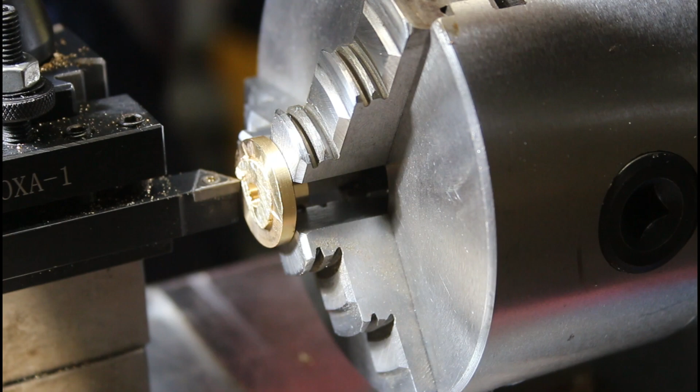Okay, I have to clean up this hacksaw mess.

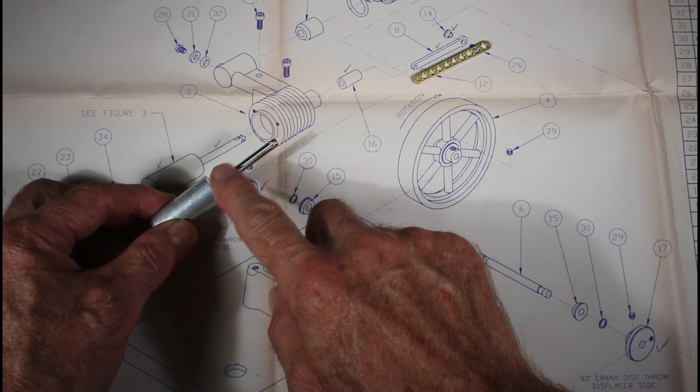In the last episode, and first episode of this series, I made the parts that comprise the displacer piston assembly. So I made this crankshaft, rounded it over the end, bored it through and slotted it, and made this little insert right here, and then glued all this together. In fact, actually this was press fit right into there. Then I made my own version of the, what do we call this? The connecting rod displacer, as in displacer connecting rod.

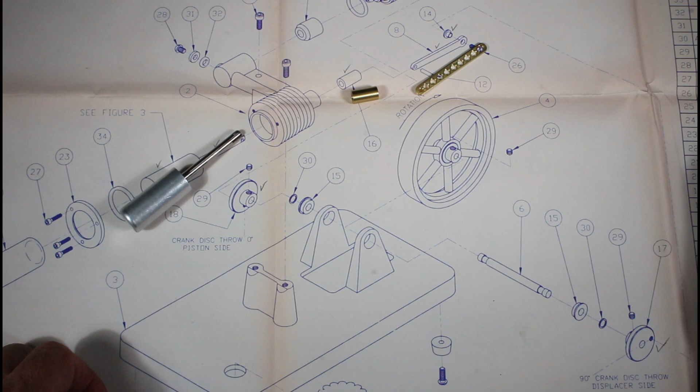Today I'm going to make this little bushing right here, which is what this part will slide through. I'm also going to make this tiny little bearing out of steel, and so that will fit right into here. And I'm going to make a crank disc for the piston side and a crank disc for the displacer side.

First up is the crank bearing. This is made from 1/4 inch cold rolled steel, so I'm going to start off by facing the end, as is tradition. Clean it up nicely. Now I'm going to start turning down the small radius, taking it fairly carefully and looking at my digital readout and checking the diameter. I think I overshot.

Okay, let's start over again. Actually, this is the second start over. I didn't show the other one. So here we go again, double checking now much more conservatively. All right, let's keep creeping in towards that final dimension. Very carefully, double check again, and will it fit? Oh yeah, that'll fit. It's a little bit loose, but I can live with that. It's a nice bearing surface.

Works for me. So now, of course, I have to bore out the center for the shaft that this will actually go onto, a 4-40 bolt. So drilling it out for the clearance hole.

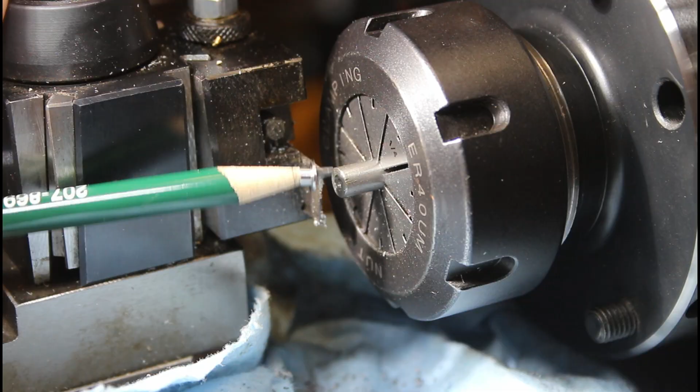And now I'm setting up my cutoff tool to be parallel to the end, using a ruler. Then I can inch over and get my dimension correct to figure out how much to cut off here, using my digital readout to see the actual dimension that I'm moving to. Referencing to the right edge of the cutter as I was looking at it, which is the left edge as you see it. This stuff cuts pretty nicely, and boom, that's a nice little part.

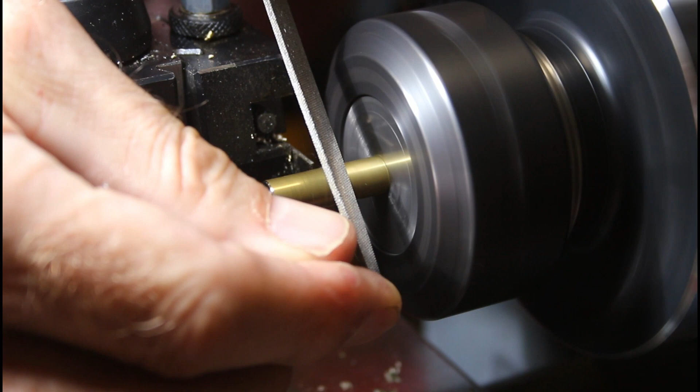Now I'm onto the displacer bushing, which is a simple bearing or bushing made out of brass stock OD and just bored out for the ID for the shaft to slide through. So I'm just doing an initial parting cut just so I can define the end. Now I'm going to deburr the end, or it's actually called out in the plans. It needs a small bevel there, and I'm just deburring it with a file. Same thing on this end. Just take the edges off. This will be press fit into a casting, so that will just help it guide in.

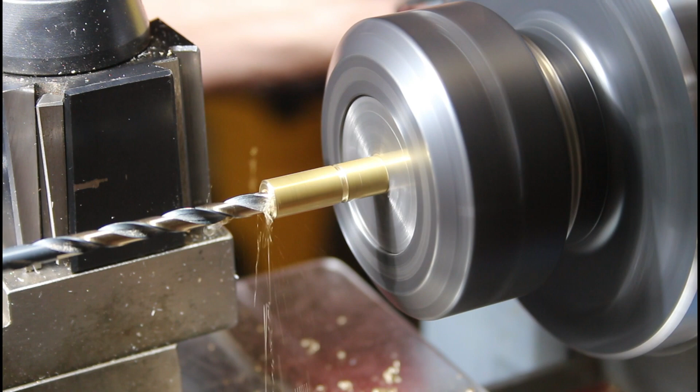All right, that looks pretty. So center boring with a center drill. And the actual drill size, or actually one size down from the final drill size here. It's wandering a little bit, and that's because I'm using one of my brand new ultra sharp drill bits, and I've learned since that I should be using a dull bit for drilling brass. So I'm switching over to an old cheap Chinese dull drill bit. And that cuts a lot better. It's not wandering and screaming and just being annoying.

So I'm speeding the footage up a little bit here to save you time, but it takes time to bore down all the way through that brass. And so here's the final drill size, which is called out in the plans as 2 different drills you need to use. So it's a perfect match to the shaft that will ride in there, and here we are checking it. It's a little bit snug. So I'm going to go up to a slightly different number drill and get that to fit better. Let's see how that's going to work out. Oh yeah, that's sliding very nicely.

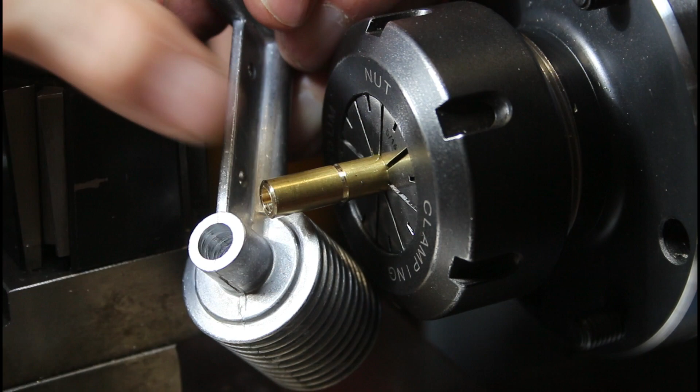So this is the casting that this is going to press fit into. I actually bored that hole out in the casting very slightly, just loosely with a cordless drill, and that is just snug enough that I'm pretty sure that will press fit in there just fine. But just to ensure, I'm going to use a little Scotch-Brite just to clean it up. There's no point in making it look pretty because it'll be buried in there. And then parting it off.

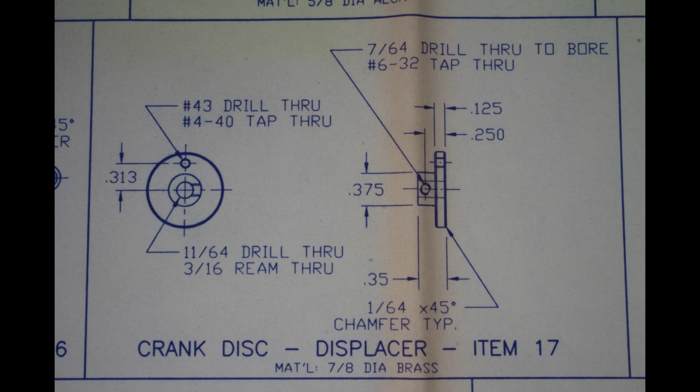Came off really nicely. So there are two crank discs with different spacings between the center line and the arm. It's made from 7/8 inch stock brass that's provided. So of course the first thing to do is to face off that front surface. It's always just so satisfying to do that. Yep, that looks pretty. So now I'm going to just clean up the outside a little bit. The outside diameter is non-critical, but I just wanted to take off the factory finish, clean it up a little bit.

So now I'm going to start reducing it, and I'm going to use the motor drive that I installed on my lathe so I can set a stop and just drive it using a little rocker switch on the side of my control panel there to just drive it backwards and forwards. So first cut goes in and then coming out is a spring pass essentially, and I can just drive it back and forth with this little switch. So I'm working my way down to the specified dimension here. I think I'm pretty close at that point. Just tidy up the finish a little bit. Nice little skim pass there, spring pass.

I'm going to bevel the ends. I could have done it with a file, but I had this cutter right there in my quick change tool post. Knock those bevels off, bring that in and get the other end here. And yes, these bevels are called out in the blueprints. So, yep, center drill.